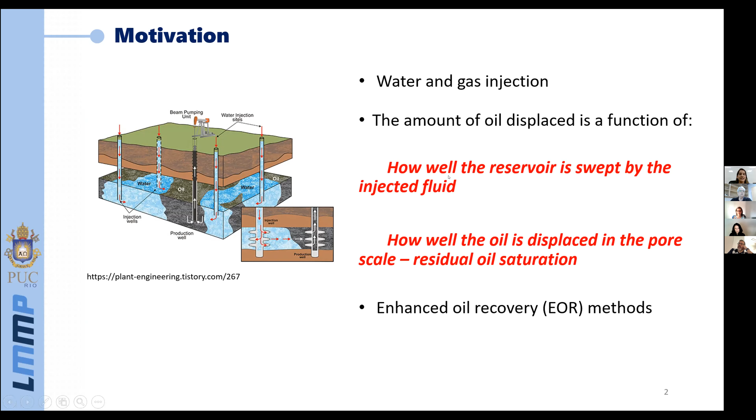Different methods can be used, with their own advantages and disadvantages. One of them is gas flooding. When injected in the reservoir, the gas flows through the upper part of the reservoir, leaving a large amount of oil behind. This is called early breakthrough. Also, we have the formation of instabilities, this viscous fingering. So the idea here is to reduce the mobility of the displacing phase.

We can do that by alternating water and gas. In the water alternating gas case, we have better sweep efficiency, but we still have oil remaining in the reservoir. In the third case, the surfactant alternating gas case, first we inject a slug of surfactant solution, then we inject gas. In this case, we are forming foam inside the reservoir during gas injection. Foams are better injection fluids than aqueous solutions because they are less sensitive to gravity and permeability heterogeneities.

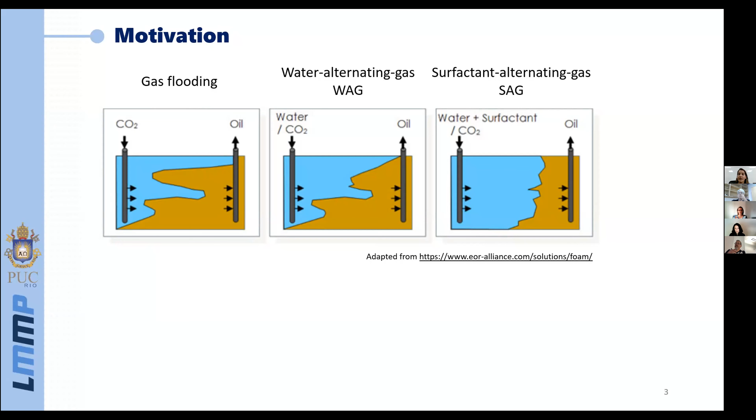The success of foam as an injection fluid highly depends on the generation and stability of lamellae inside porous media. Foams are a potential solution to mitigate the adverse effects of gravity override, early breakthrough, reservoir heterogeneity, and viscous fingering on the sweep efficiency during gas injection.

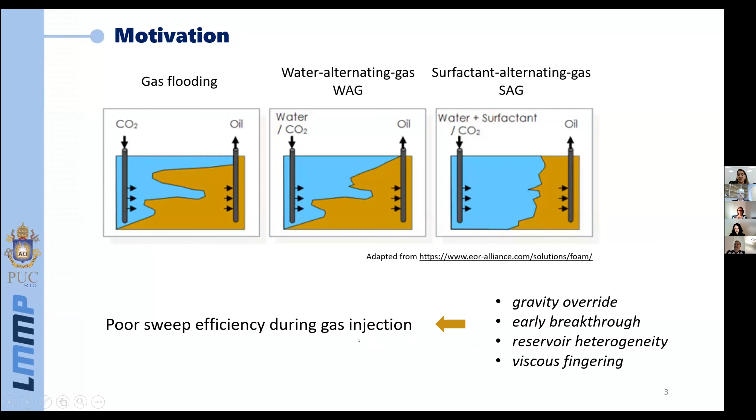Foam can behave in different ways in the porous media. We can have a gas path, with the gas flowing, and for the discontinuous gas, we can have bubbles flowing - this is a bubble train - and also gas trapped in bubbles. Foams are a two-phase system in which the gas is enclosed by a surfactant-containing liquid film, the lamella. Also, the other structures of foam are the plateau borders and the nodes.

Foam has high apparent viscosity by trapping gas in bubbles, reducing the flowing fraction of gas, and providing capillary resistance. So the idea here is to reduce the mobility ratio, and we can do that by reducing the relative permeability of the displacing phase and increasing the viscosity.

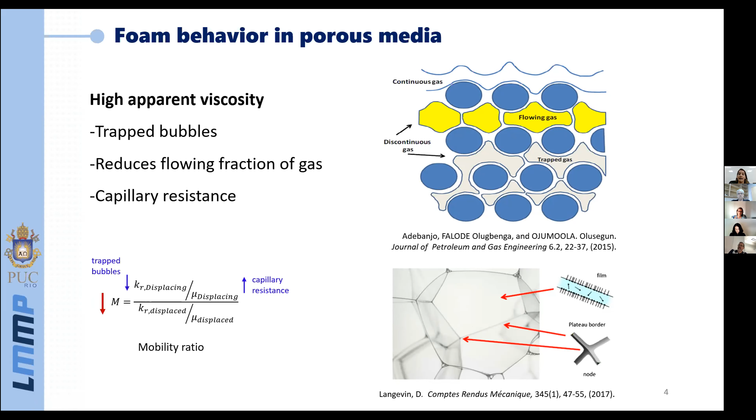Here, what we have is a three-dimensional foam. But when the foam is enclosed by the geometry, what we have is a line. Here we can see the liquid film, the lamella, and the two plateau borders connecting the lamella to the pore walls. On letter B, we can see the lamella flowing from 1 to 7 inside the pore body. In addition to the resistance provided by the presence of this lamella, the drag of moving bubbles along the pore walls imparts an additional viscous resistance.

The important parameters involved here are the lamellae number and the lamellae velocity. We are going to focus on the lamellae number. The image on the right shows the mechanisms that affect the apparent viscosity of foam.

On top, we can see that the presence of liquid between the bubbles is responsible for creating the resistance against flow. In the middle, we have the interface deformation because of the viscous and capillary forces that are a function of the flow rate. And at the bottom, we can see the surface tension gradient - the surfactant depleted from the front accumulates at the back of the bubble, and this slows down the motion of the bubble.

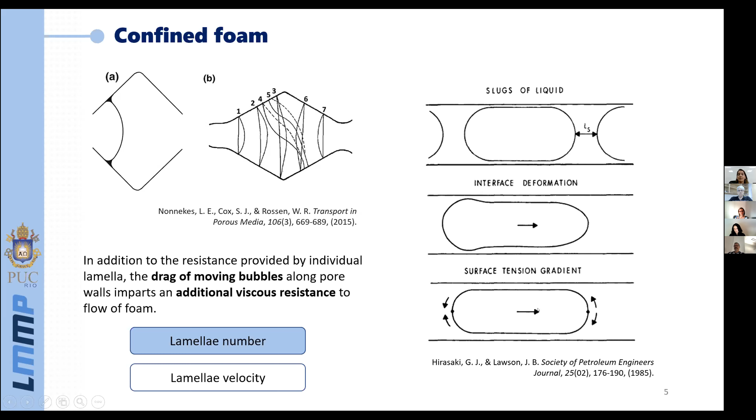The foam can be generated in different types in the oil industry. We can have a preformed foam, where the foam is generated outside the reservoir. We can have a co-injection foam, where we inject the surfactant solution and gas at the same time. And in the third case, surfactant alternating gas, we alternate the injection of surfactant solution and gas, forming foam inside the reservoir during this process. Regardless of whether bubbles are generated outside or in situ, the porous media molds and reshapes them.

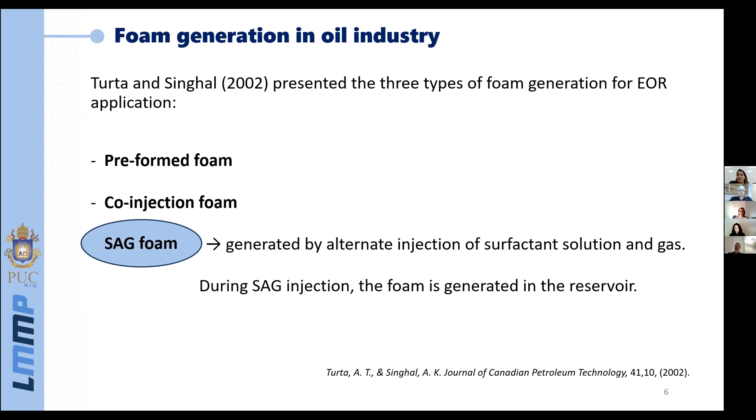Now, the literature review. In 1958, Bond and Holbrook were the first to show that foam generated in the oil reservoir by consecutive injection of surfactant solution and gas could increase sweep efficiency. And they described their invention in a patent.

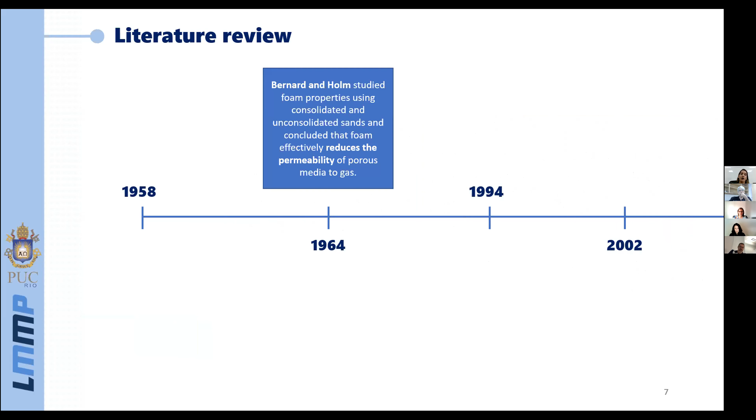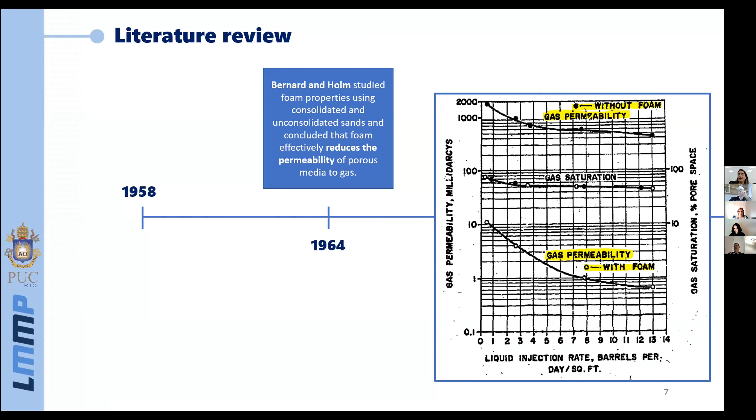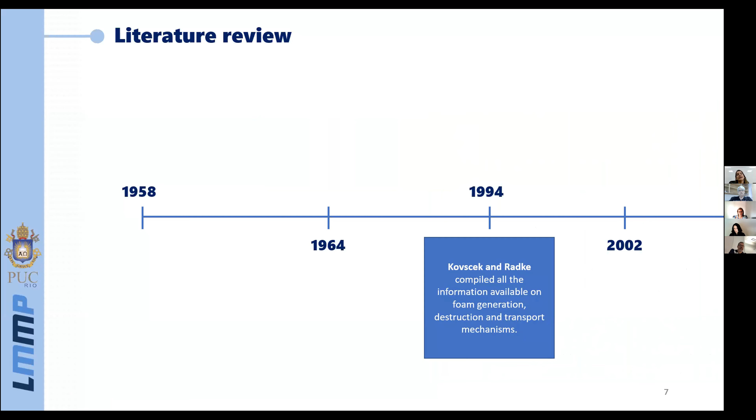In 1994, Kovscek and Radke compiled all the information available on foam generation, destruction, and transport mechanisms in a really interesting work. Here on the left, we can see one example of a foam formation mechanism called snap-off. In letter A here, we can see a gas finger entering a throat that was filled with the wetting liquid. At this time, the curvature and local capillary pressure rises to the equilibrium value.

On B, we can see that when the bubble goes to the pore body, the curvature and the local capillary pressure falls with the expansion of this interface. At this time, we have a gradient in the liquid phase that goes from the pore body to the pore throat, accumulates here as a collar, and then detaches the bubble. On the right, we can see how foam behaves in a porous media. We can have a continuous gas channel, gas trapped here in bubbles, and the liquid films.

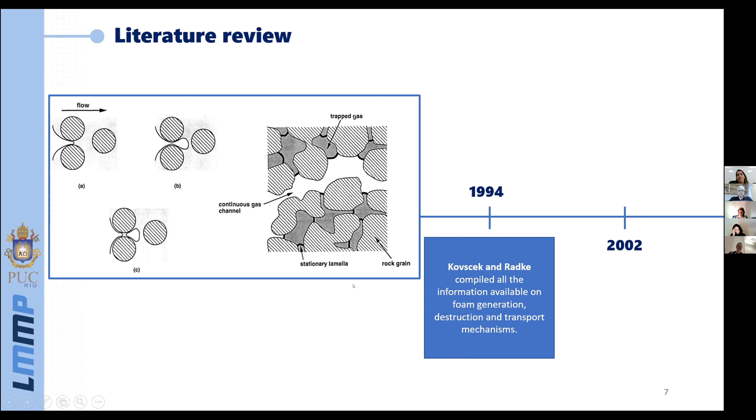In 2002, two works were published in the same journal, both studying foam generation in homogeneous porous media. The idea was to correlate the minimum pressure gradient, that is the pressure enough to form strong foam. For Gauglitz, the minimum pressure gradient scales with 1/K, and for Tanzil, it scales with 1/√K. The difference between these values could be explained by the fact that they used different surfactant solutions, different experimental conditions, and one did the measurements during the transient regime while the other waited until steady state.

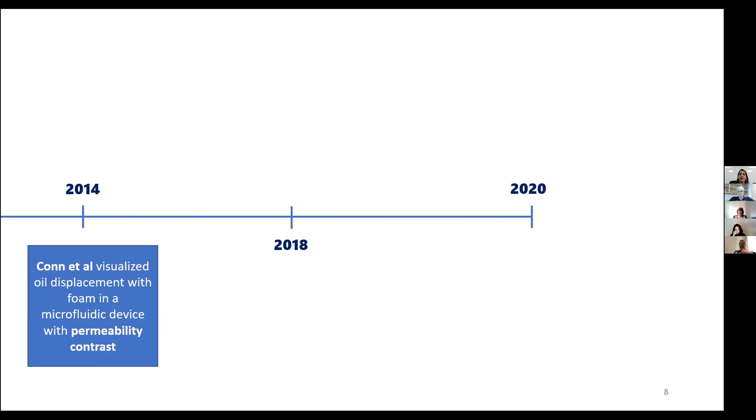In 2014, the Lisa Biswal group visualized oil displacement with foam in a microfluidic device with permeability contrast. Here is the porous media. The foam was pre-generated using a flow focusing device, then injected into this micro model saturated with oil dyed in red color. Foam first goes to the high permeability zone, blocks this area, and then diverts the gas to the low permeability region here.

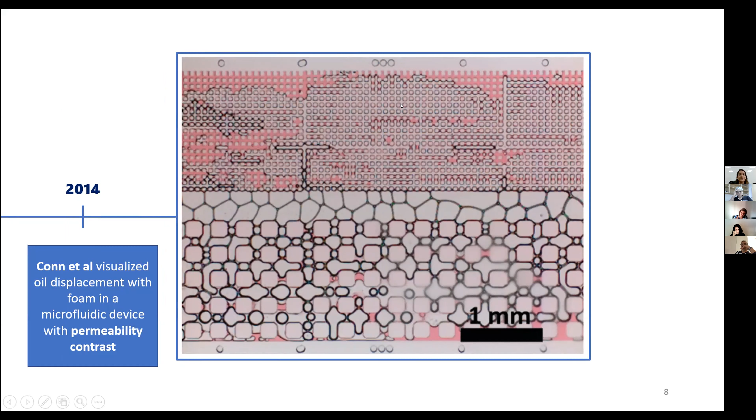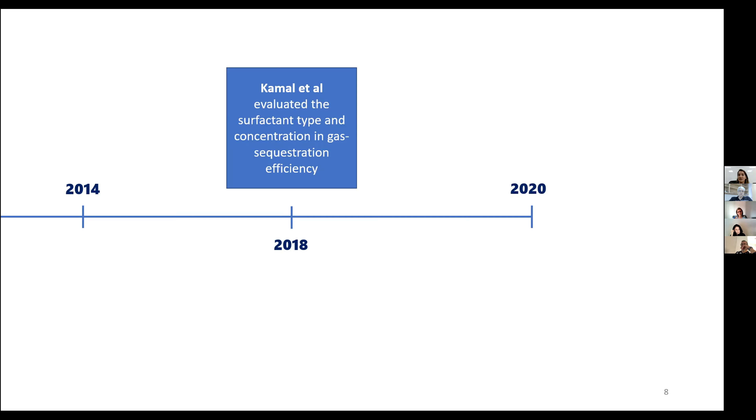In 2018, Kamal and collaborators evaluated the surfactant type and concentration in gas sequestration efficiency. To do that, they used core flooding systems here. And when they increased the concentration of the surfactant, they saw a huge increase in the pressure. This is the orange curve, the higher concentration case.

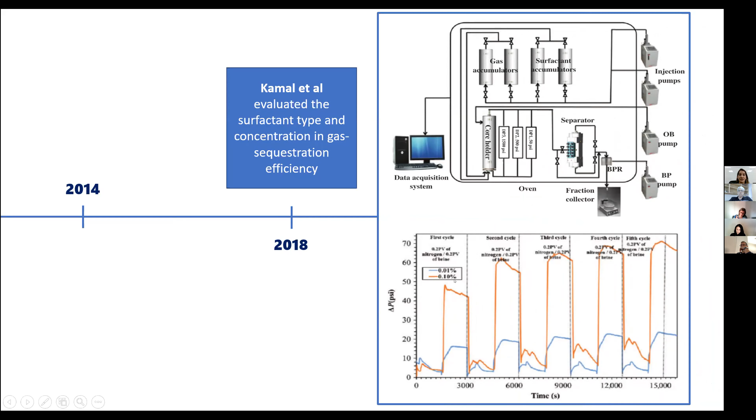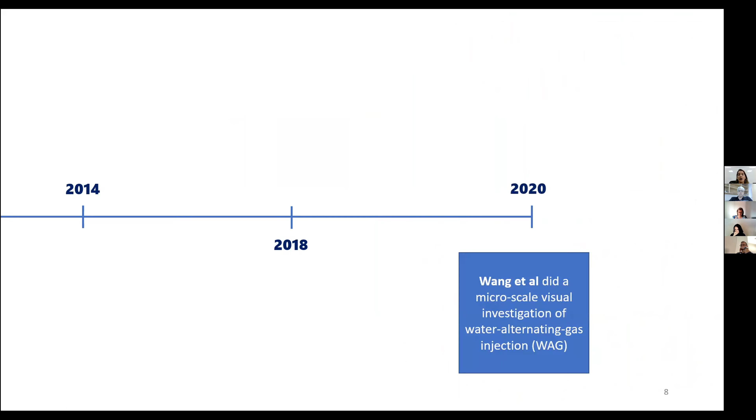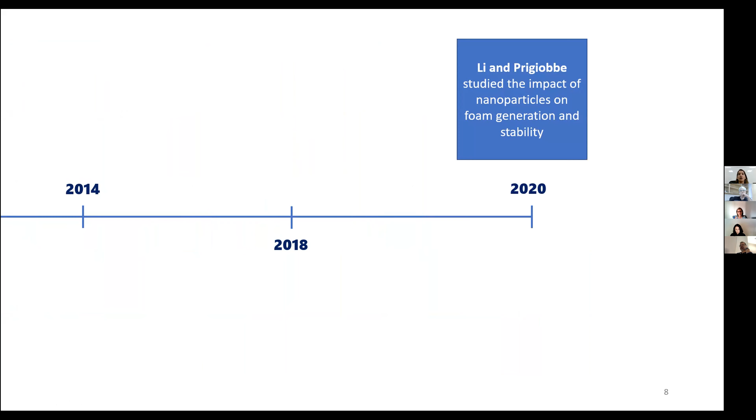Another work published the same year studied the impact of adding nanoparticles to the surfactant solution on foam generation and stability. They used a micromodel made with glass and dolomite, and added nanoparticles to the surfactant solution. They counted the number of lamellae generated, and also did pressure measurements.

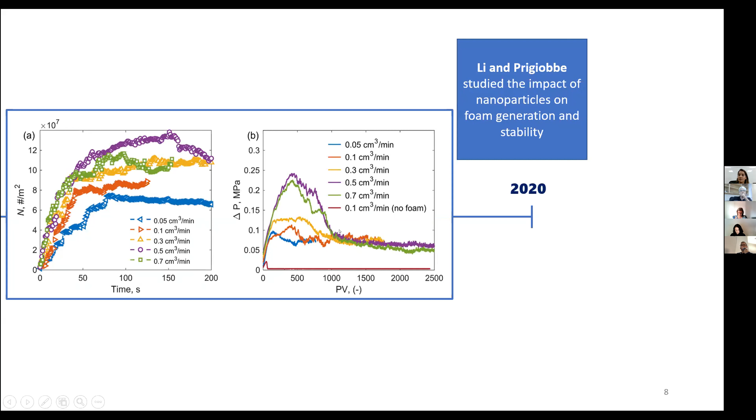Most of the studies that focused on pore-scale analysis are concentrated on preformed foam. In our case, we are going to form foam inside the reservoir during the gas injection. The surfactant concentration was studied before, but in core flooding systems that do not allow fully visualizing the dynamics. And the observation was conducted in other works, but not evaluating the surfactant concentration impact.

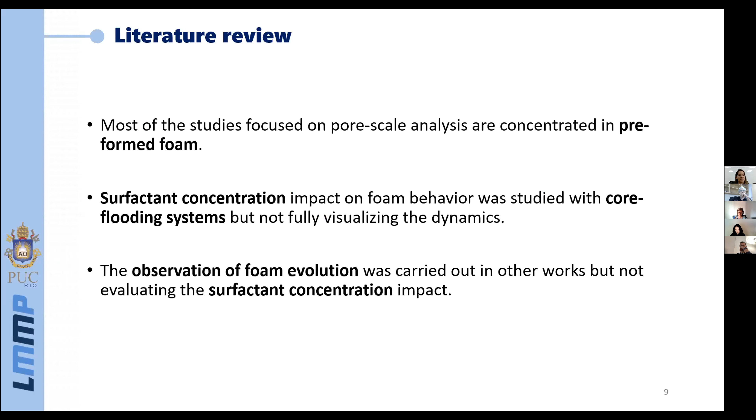The goals here are to study foam generation during drainage of a surfactant solution by gas, and oil displacement during SAG injection through a 2D porous media using a microfluidic system. Also to visualize the pore scale phenomena and obtain macroscopic information from the pore scale analysis that can be used to improve continuous models of foam formation and flow in porous media.

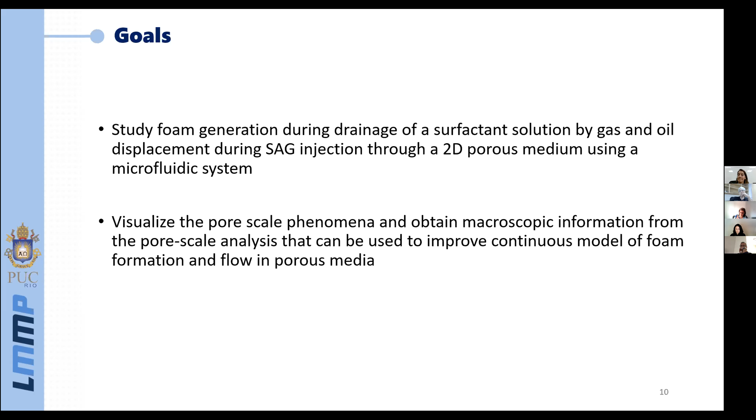To do that, we're going to use a 2D micromodel made with glass by Micronit. Here is a picture of the micromodel and its sizes. We have the inlet, the outlet, the glass pore structure, and one buffer zone at the entrance and another at the outlet. Here are the properties of the micromodel: pore volume, porosity, permeability, and channel sizes. Our biggest throat is around 250 micrometers, and the smallest around 12 micrometers.

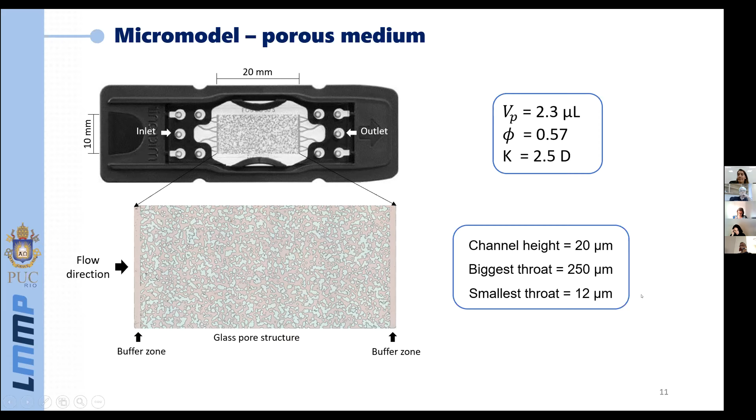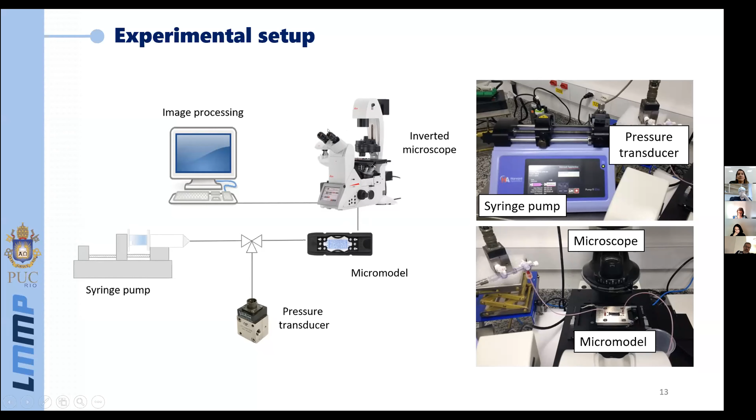This work was divided into two parts. The first part is about foam formation during drainage of a surfactant solution by gas. To do that, we used this experimental setup consisting of a syringe pump, a gas-tight syringe filled with air, a pressure transducer to monitor the pressure during gas injection, a micromodel, an inverted microscope, and a computer to do the image processing.

The materials used in this part: we used a surfactant solution made of a mixture of water and sodium dodecyl sulfate, an anionic surfactant. Here we can see the interfacial tension curve as a function of concentration. All these values plotted here were obtained when the interfacial tension stabilized for each concentration. The critical micelle concentration for this solution was 0.47 grams per liter, and the surface tension above the CMC was around 34.4 millinewtons per meter.

Another important parameter to consider here is viscosity. Here we have a table of viscosity for the different surfactant concentrations that we used. We can see that when we increase the surfactant concentration, the viscosity slightly increases.

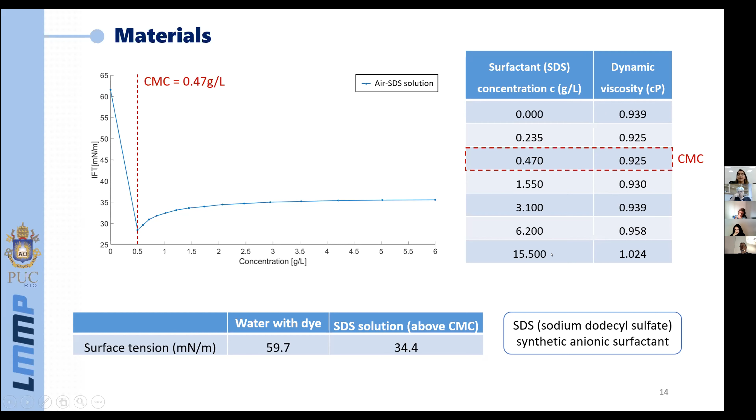To do the experiments, first we have to saturate the device with carbon dioxide to ensure complete saturation of the liquid phase. Then we saturate the device with water or surfactant solution. We use a different concentration for each experiment and inject 3,000 pore volumes. Then we inject gas at a constant volumetric flow rate equal to 1 or 2 milliliters per hour. We measure the pressure and visualize the flow dynamics, and the gas injection was stopped when steady state was reached.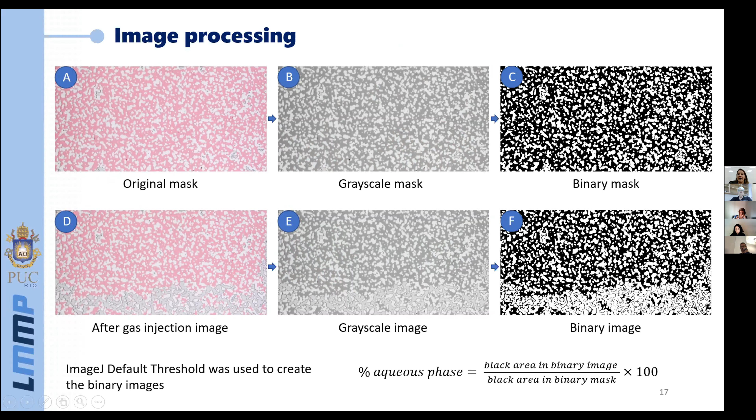To calculate the percentage of aqueous phase left in the reservoir, in the porous media, we divide the black area in the binary image by the black area in the binary mask. For this pure water case, the amount of water left was around 70%. We can see that the gas forms this preferential path, percolating the porous media from the inlet to the outlet.

Here is the pressure behavior during the gas injection. We can see that the inlet pressure rises for a very short time and then falls quickly, stabilizing at steady state.

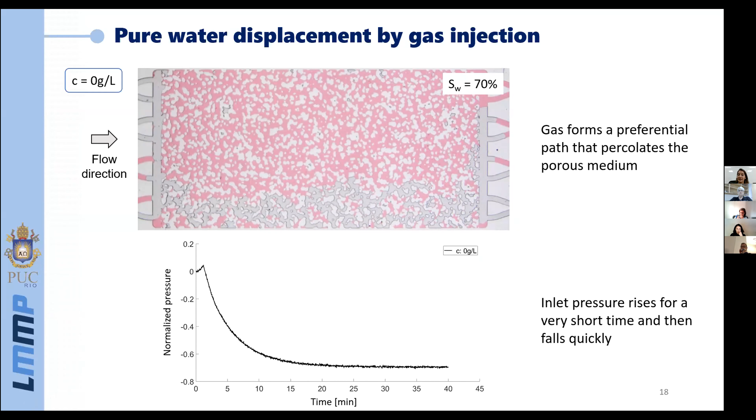Now we are going to start adding surfactant to the aqueous phase, and we're going to see that surfactant completely changes the flow behavior inside the porous media. Here we are below the CMC, at a concentration of 0.5 times the CMC. We form a few lamellae here, which we can see at the end of the porous media, and then we form two preferential paths, one here and the other one here.

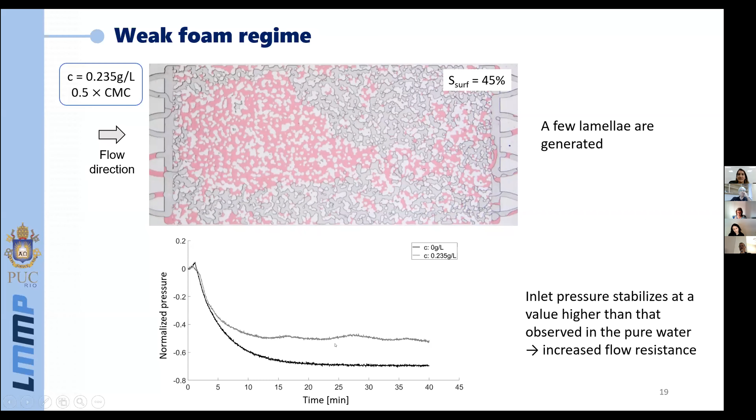The inlet pressure behavior is shown here in this gray curve. The pressure rises a little bit, then stabilizes at a plateau that is higher than the one obtained with pure water. That means we increased the flow resistance in this case.

Now I'm going to show you a video. At this time, the micromodel was saturated with surfactant solution. The concentration was one time the CMC. We are at the CMC now. The flow rate is the same.

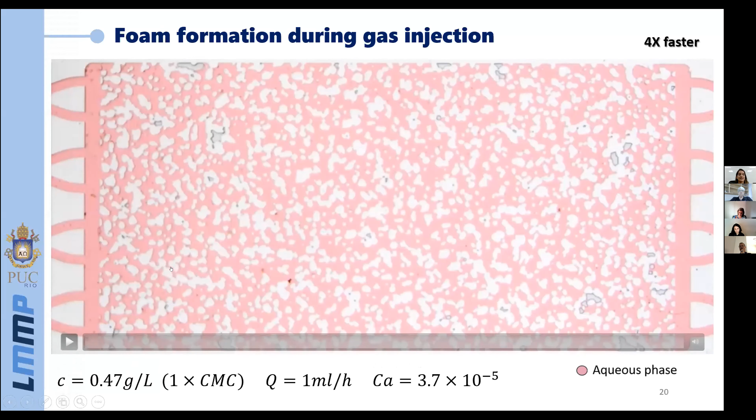This video is 4 times faster than real time. You're going to see the gas invading the micromodel from the left. The gas percolates the micromodel, and what we are seeing now is that we are forming foam inside the reservoir. Because of the geometry here, you can see that we have all these bubbles formed.

Now we are going to see a case in which 30 times the CMC was added to the aqueous phase. The same flow rate was used here. This video is 16 times faster than real time.

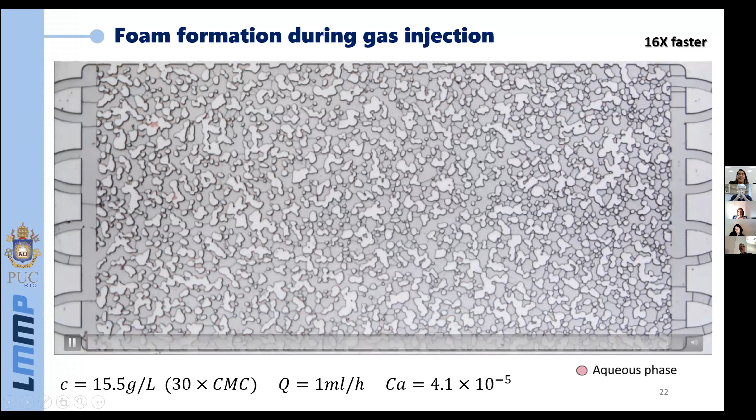At the end of the test, here I will put in the end of the video, the gas found a percolated path, and the whole device is saturated with gas. We only have liquid present in lamella form.

For these cases, all above the CMC, we have the same interfacial tension, but we have completely different behaviors in the pressure.

One possible explanation for the existence of these 2 plateaus is the thickness of the lamellae that were formed. So we believe that when we have higher concentrations, we are forming more lamellae, and we have enough surfactant to stabilize even thinner lamellae. In this case, we have thinner lamellae, and then we have a lower resistance to flow.

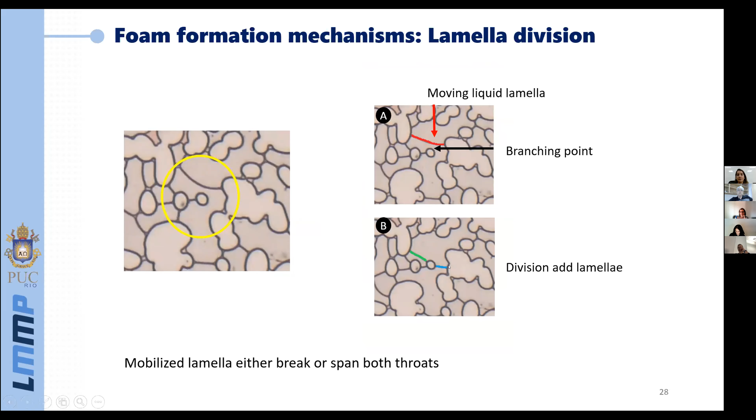Another foam formation mechanism, the lamella division. In this case, we have a moving lamella. This moving lamella finds a post or a branching point and then divides into two new lamellae, the green and the blue ones here in letter B.

Concerning the foam destruction mechanism, we have the coarsening. In this case, we have gas diffusion from the small bubbles to the larger bubbles due to the pressure difference. So large bubbles grow at the expense of the smaller ones.

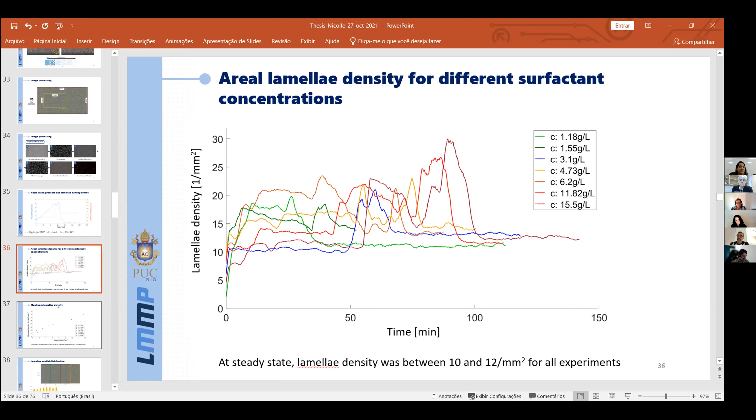So I have the same amount of lamellae in both cases. In both plateaus, I have the same amount of lamellae at the end. So I counted this multiple times, even in the whole device, the measurements that I did in the whole device. So at the end, I have the same amount. But I think I have a picture here, a backup slide with a different one.

So I think when we increase the concentration, we can stabilize thinner lamellae. That's for me one possible explanation for that. Maybe I'm not really familiar with foam enough to see how the thickness is going to affect the final pressure.

But do they move at the end when you're still injecting? No, they're not moving at the end anymore. Here, let me show you a video.

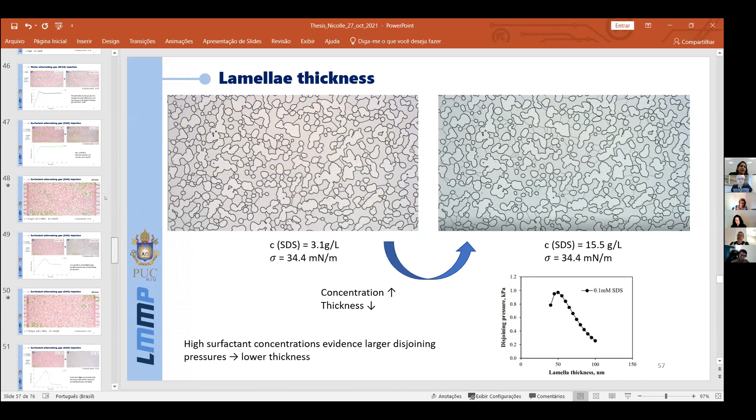Let me throw one more thing to complicate the discussion: when we first saw these results, we thought that there would be different percolation paths, so the lower pressure would mean we have more percolated paths. This was not the case. Sometimes at the lower pressure we only have one percolated path, and at the higher pressure we have more than one percolated path, which I cannot explain. I don't understand why.

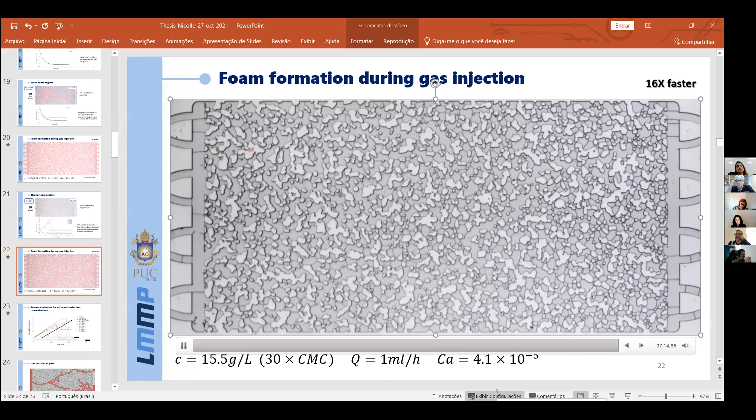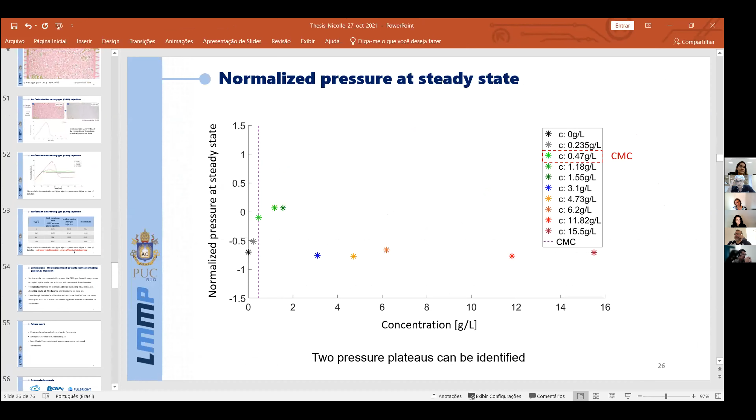Yeah, I have the percolated paths here too. So in this case, we are at the higher plateau, and we have much more paths than in the one with the lower plateau. That for me is the opposite of natural thinking. I was expecting the opposite, that for the lower plateau I would have more paths.

In your skeletonizing, before any lamella are there, does this look like a low resistance path compared to the other one? Could that be an explanation, that it just happens to have picked a low resistance path for this one? These, so in the case with higher concentration, you have...

Yeah, this one here. Yes. What Tim is asking, if you go to this slide, is by any chance this one a lower resistance path than this one? Yeah, I don't think so. We did a numerical simulation of the single phase flow, and it doesn't look like there's any particular preferential path. It seems very uniform, like the grain or pore throat distribution.

Okay, so that cannot be. Well, this is a very complicated business. Yeah. Thank you. I think I have another question.

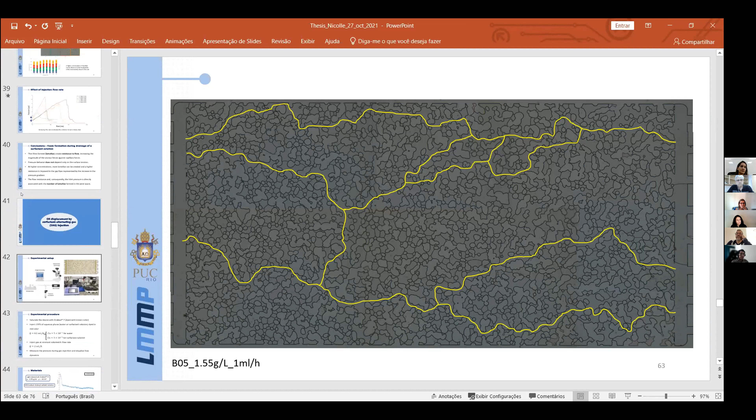So in this slide where you changed the flow rate — this one — yes, okay, so when you double the flow rate, technically the time should be half to reach steady state. Do they fall at almost the same time if I divide the time for faster flow rates by 2? If you divide the time that it takes to reach the steady state? Yes.

Yeah, I didn't calculate this relationship with time. I know the values for maximum pressure, but I don't know if time is related. But if you make the time dimensionless with the flow rate, the slope is the same, so I think this looks the same. I did scale this up plotting the flow rate.

That's in the thesis, the writing part. I had a suggestion when I sent you comments - what we're saying is that if you put this in terms of pore volumes injected, that's another way of normalizing this. Do they overlap? Yeah, it's a great idea.

Sorry for the interjection - yeah, it would be the same normalization. I had a general comment at the beginning in your literature review. You showed us two different scaling approaches: pressure scaling with inverse of the permeability, or the square root of the inverse of permeability. Is there any way you can compare your results with either scaling?

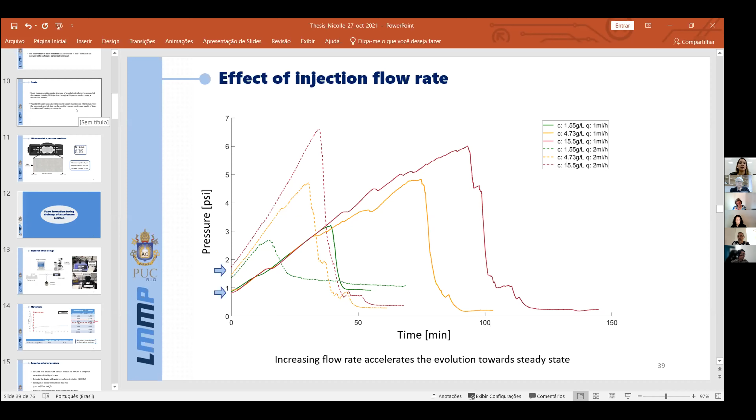No, Nicolle, can you go back to your introduction - is it this part? Yes, this one, right? Yes. No, they formed the... ah, okay, sorry, I was confused.

I didn't try to make a relationship between this pressure gradient and the permeability, but it's a good idea. I can calculate that to see if there is a relationship.

Do you think it's possible, Marcio? We have one permeability only, so we cannot - we could try different models, but we only have one, or Nicolle ran the experiment only for a single device.

And one thing is that, like in the plot where she showed the number of lamellae, you have a very sharp increase in the very beginning, but I think it's a different system, because in this case they are co-injecting gas and liquid. In our case, we are injecting gas into a saturated porous media, so we start forming lamella right away. That's why in the number of lamellae she showed a very sharp increase and then a stabilization. I don't know if we can directly compare, because in these other experiments they are controlling the saturation of the gas phase with respect to the liquid phase, while in Nicolle's experiment, she's changing the saturation with time. So I'm not sure if it would be easy to get a comparison or correlation with these experiments.

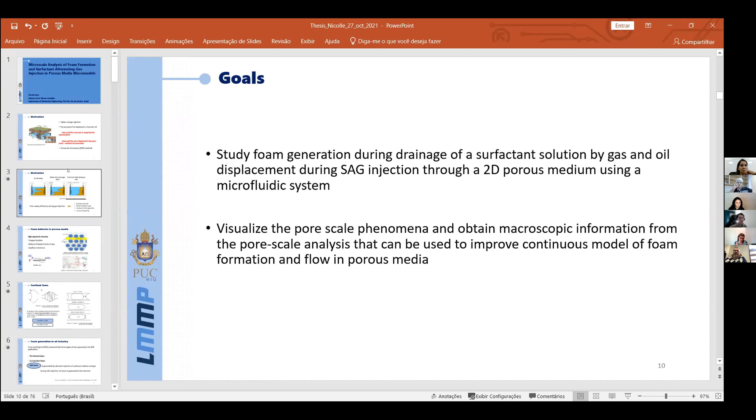It's a graphic of pressure over time, so you have time on the horizontal and pressure on the vertical. This one here. Yeah, that's the one.

So usually in oil engineering, we put breakthrough time in all graphics like that, because I try to understand from your video and it doesn't seem so. If it would be in core flood, this peak should be the breakthrough. But it doesn't seem to when I saw your video. So now I'm a little bit lost. Maybe you can mark, is this a breakthrough? Yeah, this is the gas breakthrough.

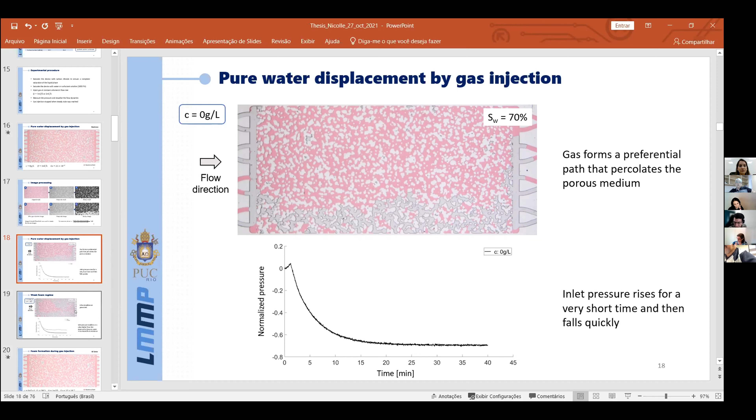Yeah, but then it's another one. If you go, I think to 17, and then this one. And then you can see that when you add surfactant, it's quite smooth. There is no peak anymore. There's a really small peak here, but so where is the breakthrough? So maybe it's a good point to add breakthrough to all figures in your thesis, just to make sure the reader understands what's going on.

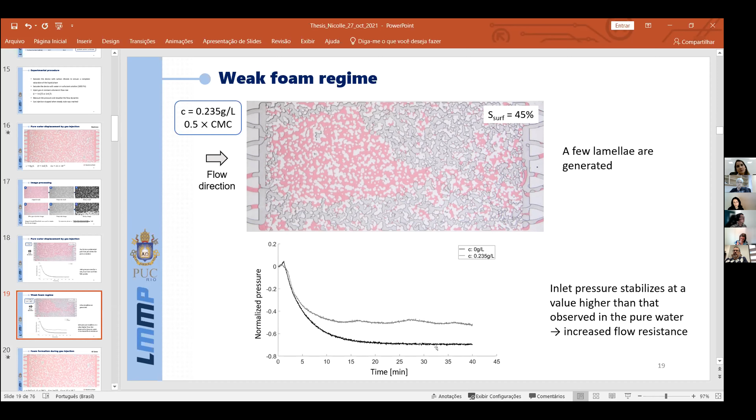Because then the question, of course, is with surfactant, do you have earlier breakthrough or later breakthrough? Exactly this one. So here, in all these times we have... oh, not the breakthrough. Yeah, sorry, this is when we find the percolated path. So not the breakthrough. Yeah, it's really, I didn't understand, and I don't really understand the physics here.

So it would be interesting to know if you already did the experiment, so you can just conclude something about the breakthrough time. Yeah, I already have the time for each experiment, the time for the breakthrough. It's really easy to add like a line or a point to mark the time when we have the breakthrough.

One important point that's not clear to me is what is the breakthrough in the case that you have a surfactant solution? Because is it the first point where some gas reaches the outlet, but it's not a percolated path? Oh yeah, you're right, so that's the point. So the percolated path is the maximum there. You're right, already producing a lot of gas, but it's not a percolated path from the inlet to the outlet. Yeah, you're right, Marcio.

So it's only for the graphic where you don't have foam, so it's the first one. Yeah, you're right, and then that might make sense, of course. Okay, then in the figure, your slide 23 again. So my natural expectation, if you add more surfactant, at some point it has to just stop making lamella. This cannot grow forever, right?

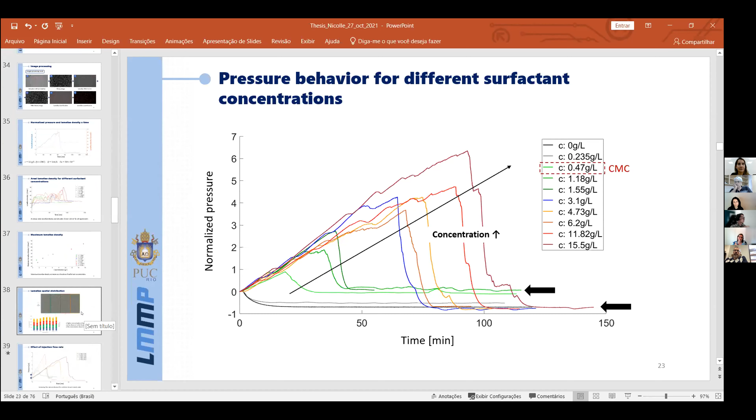Yeah, I have a theory, I was thinking about that the other day. Here in this total lamella number, you can see that we have a maximum value at the exit, and the values here were growing as we increased the concentration. All the values were around 600. I don't know if maybe in this region I would reach 600 too, maybe having the same amount of lamella as in the other regions.

So what you're saying, actually 15 is quite close to the border. No, 15 is the highest concentration. No, I mean if you put 18 or 20 and then it stops forming anymore, then there is no effect, so somewhere there is a limit. Yeah, there's a limit, yeah that's what I'm saying. Maybe the limit is like around 600 lamellae per region.

Yeah, no, I understand what you say, it's perfect because I didn't see any work about that. Actually we are working on modeling how surfactant concentration influences foam displacement, and there is a lot of literature, a lot of hypotheses. The most common one is that above CMC, nothing happens - that's the dogma today. So your thesis is changing something on this point, because today, over CMC, there is no influence of surfactant in the mathematical models on foam displacement, and you're saying, no, it's actually a lot of difference.

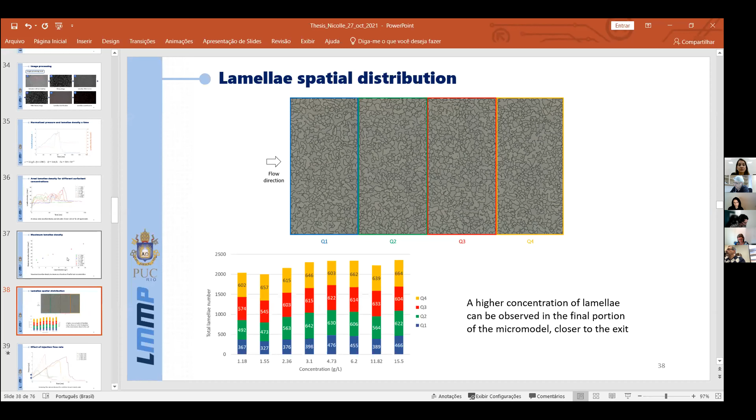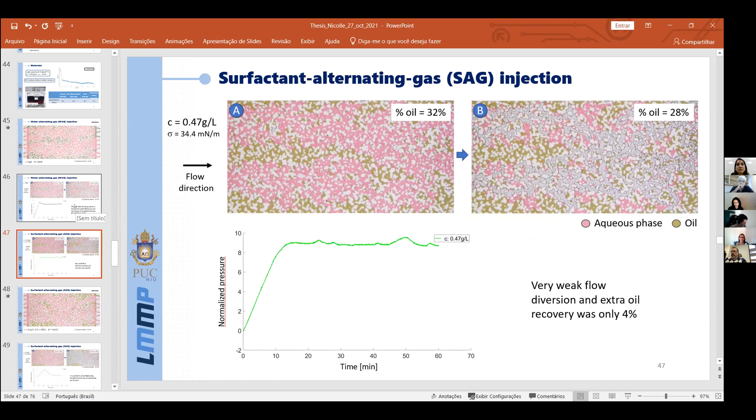Okay, well, and then in chapter 5, you have this discussion about weak foam and strong foam. And then you show in this graphic of pressure that you have a lot of pressures depending on surfactant concentration. Yeah, you show them, yeah, for example.

So then you argue in your thesis that some of them are connected to weak foam and some are connected to strong foam. And there's this classical figure—it's really recent, actually, not so old—where you measure, you change the flow rate, so FG or FW on the horizontal axis, and then you plot your apparent viscosity, and you get a triangle. So we say that the left part of the triangle is weak foam and the right part is strong foam. You have a really classical division of what is weak foam and what is strong foam, just visually.

And then I was wondering if there's some other type of study, since you are studying different directions. So you are now just changing concentration, so the FW is the same—the amount of liquid you are injecting is the same. So you are just adding one dimension to that plot, and maybe there is some change in behavior depending on concentration. I'm not sure it's trivial for you to plot, but maybe you have a lot of data, so the point is plotting this data in some smart way, and maybe you can observe the behavior change. This will actually make a lot of difference as well, because that plot was really classic and now it's everywhere.

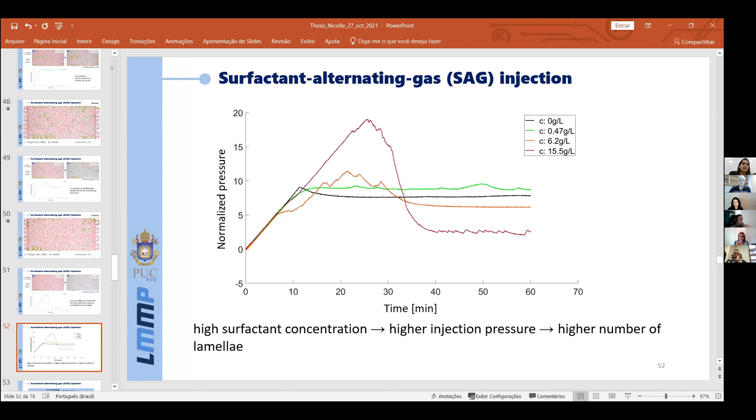I agree totally with Vladimir about the goals, especially because when I started reading, I was also kind of lost in that first chapter of introduction about the objectives exactly. The second chapter gave me a better idea, but still - when you show, not the goals but the slide before the goals, which I think is slide 9, if you can show it - I understood better, because it's really the gap in the literature that you're addressing. More studies are focused on that, and how surfactant concentration can impact it is what Grigory is so interested in. You already got his interest because there is a gap in the literature and knowledge there, and I saw that clearly reflected in the results, because I wasn't quite matching what I saw in the introduction with the results. She focused both on chapter 4 and 5 on the effect of surfactant concentration on that.

My first suggestion, and it's not a requirement, just a suggestion - it doesn't even have to be for the thesis. Did you already publish this work? No, not yet. Then I suggest that for the title of the paper, you include the words 'surfactant concentration', because that is going to be the key factor in your research. If you just leave it like 'micro scale analysis and foam formation', there are going to be a lot of those keywords in the literature already. But when someone sees that you studied the effect of surfactant concentration on that, it becomes more interesting and fits more into the gap you detected in the literature. Also, reformulate those goals to be more specific and point out what you really want to show - I think you show some of that. That's just a suggestion. I know changing the title of a thesis is very complicated, so no need to do that now for this thesis, but at least for the paper, I will strongly suggest it.

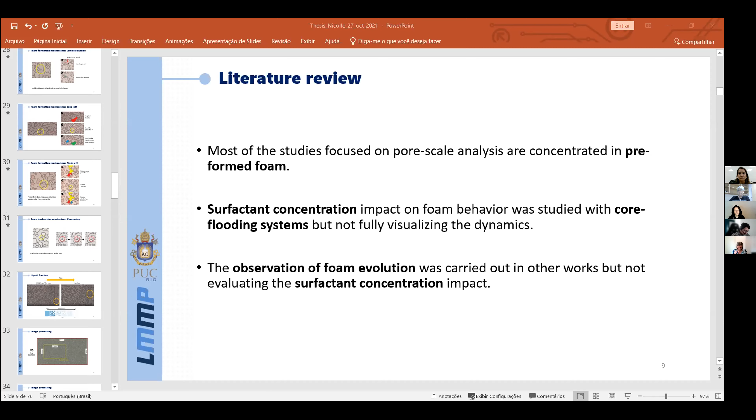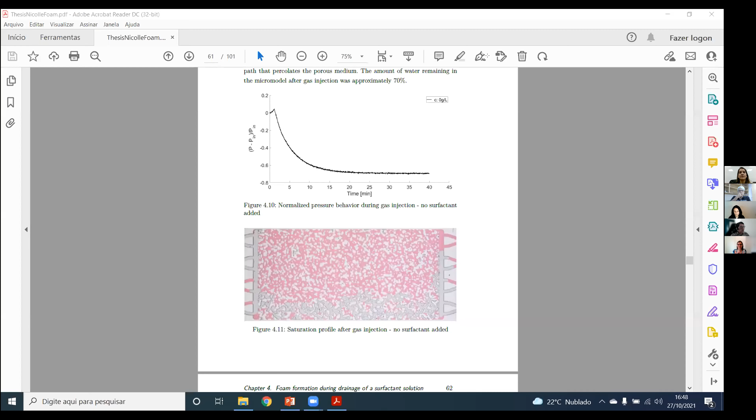But I really want to discuss the surfactant with you. So if you go to, and now I'm going to need this thesis, if you can put it up, because I don't think you're showing here figure 3.3, which is the air-water interfacial tension. If you can, please, let me share the screen again. Since you mentioned you haven't published yet, I'm trying to help here before you publish, some things I would like to point out. The thesis? Yes.

Which page? It's page 47. Yes, so you see, that's a typical graph for me of either contaminated water or a not clean enough pipette for the tensiometer, because water, especially with that conductivity you're showing there, I assume it's Milli-Q, because it's very low conductivity. Water surface tension is 72.5 or around that point. It cannot be 62. In this case, we added dye to the water. But you added dye to the water when you measure the interfacial tension? Yeah. Because what you have there is typical, water will never reduce the surface tension like that. That will be the dye in the water. So then in that case, you need to specify that, because the way you say it, the equilibrium surface tension of the water is 59.7.

Yeah, here. So if you added the dye, for me it wasn't clear at which point you added the dye. I think it's important. Even if you don't need that, as I don't think you need it, at least in this case, that can make a bit of difference. If you don't need that, I wouldn't even show it, because it's just bringing a question of why you have a water that reduces surface tension lower than expected, and it takes more than 2 hours to stabilize. It doesn't make any sense in my head. It has some contaminants, that's what I was saying. But if it is the dye, it means the dye is a little bit surface active, and depending on the concentration of the dye, it can also be affecting the surface tension curve of the surfactant.

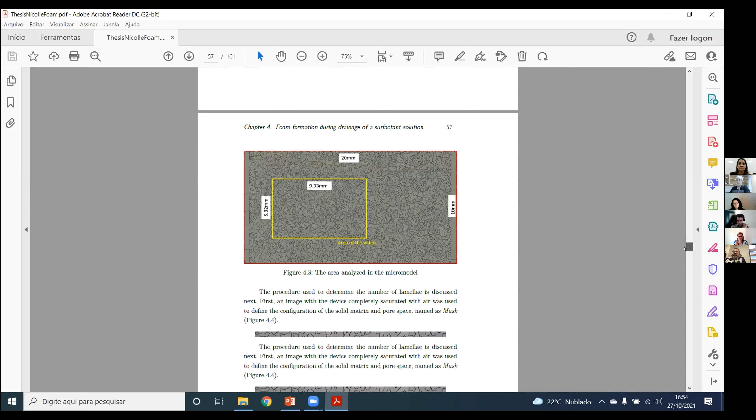Because if you start looking now at all the graphs, for example, if you go to the one I separated into two. If you go to the page, what can be the graph? That graph that everybody has been discussing, slide 23, I think, is page 66. You can go to page 66.

Here, if you look at that without looking at the concentration and not knowing where the CMC is, for me there is an obvious trend for the three green ones, and then the blue one changes the trend. Now you go to see concentrations, and the green ones are 1.18, 1.55, and the blue one is 3.1. So exactly where I told you that should be your CMC.

And CMC might not seem important, and I understand for lamellas and all that, but CMC is important because you need to be at least above CMC to get some good results. And you can see that also correlates with the lower pressure. The blue one is the one that goes all the way down, while the green ones, which are below CMC—well, in my opinion you still are above—so you have different trends, and that makes more sense to me.

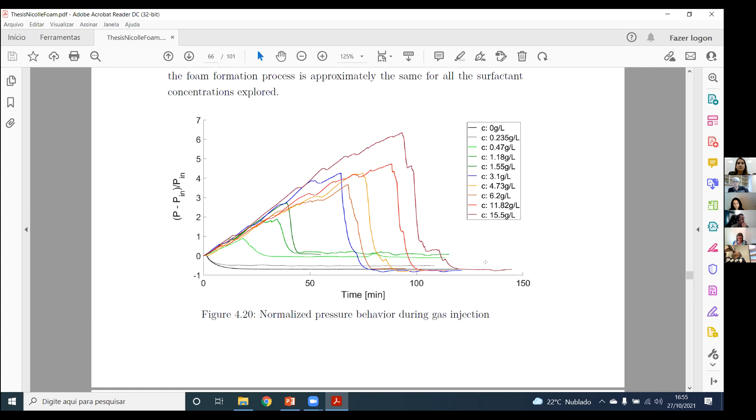Forget about the 15.5, which I think is a very, very high concentration. It's like 10 times, which is not 30, it will be something around 10 times CMC, but 10 times is a lot, right? But you see the other ones are almost stable, so that means plateau. Even when the number of lamellae can increase, you can see a behavior that is more stable, while the other one is increasing, because actually below CMC you don't have enough surfactant to have something.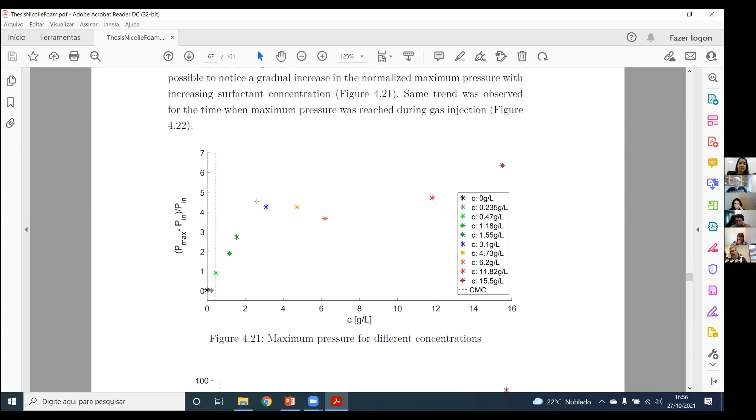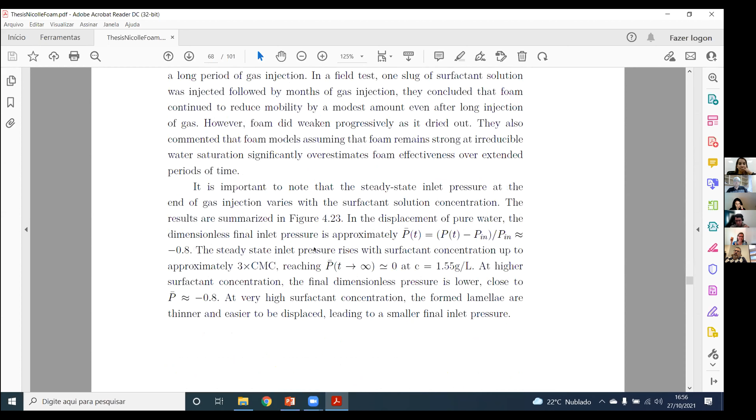So I suggest you rethink about the CMC that you are reporting, and I can send you the paper. It's quite an old paper, but there are other papers more recent that explain very well why in commercial surfactants like that one with 90%, you can see that. Because then you will have to rewrite some of the explanation. You cannot call it anymore below CMC, above CMC, but I think it will make so much more sense.

Even when Shima was talking about the one that only has 2 percolations, I think it passed at exactly 3.1. I was like, oh God. It's so easy to explain when you consider that the CMC is between 1.5 and 3.1. If you had salts in there, I'd believe the CMC was lower, because salts reduce CMC, but you don't have any salts here.

As I say, for every graph from there, I'll give an explanation based on that. What's also important regarding the thinner lamella you observe at very high concentrations, it might relate to what I mentioned earlier. Even with a large number of lamella, it can weaken the film's elasticity because the Marangoni effect doesn't work well when the surface tension gradient is resolved by surfactant in the bulk rather than the lamella. Imagine elasticity like this, and the surfactant makes it come back. But if it comes from the bulk, it just stays stretched, it doesn't go back, and that weakens and thins the lamella. Because of that, you get a lot of destruction of lamella. That's what's interesting, that the number of lamella keeps increasing.

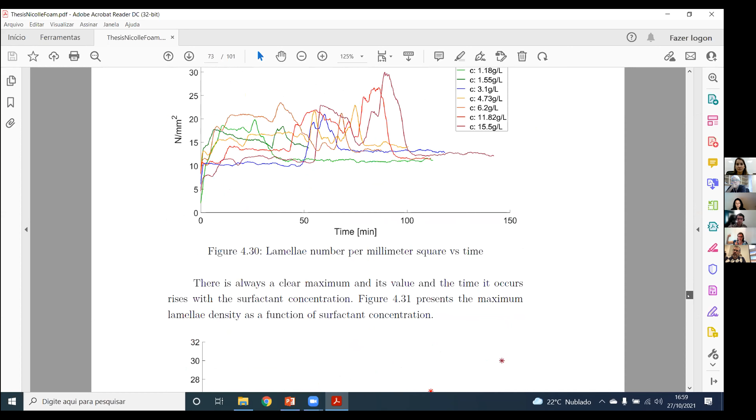But that depends on how you manipulate graph 4.30, where you count the number of lamella, because it has several peaks. It's true that 15.5 has a peak, but it also has a first peak before that at the same level, same with the red line, and then it decreases. So on those two higher concentrations, you have two peaks. I'll stay with the first one, which you can compare with the others, and you'll see it stabilizes, it doesn't increase anymore.

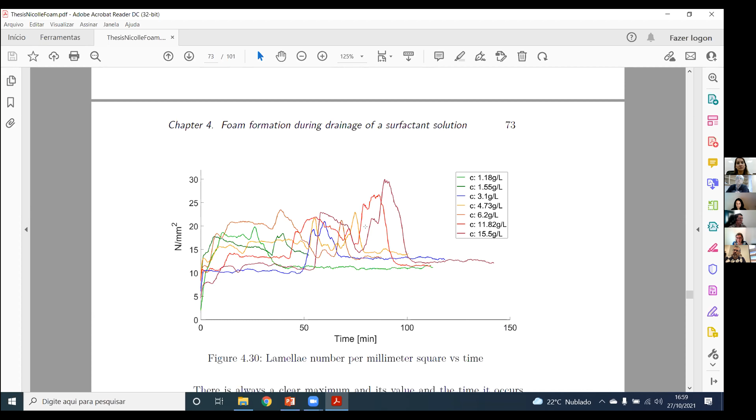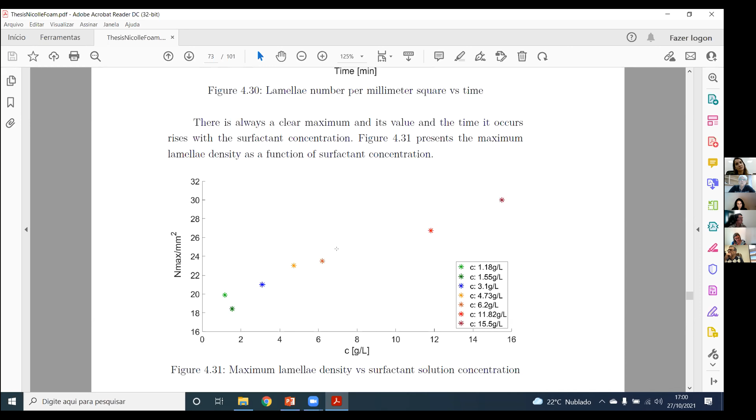CMC is not the key, it's not the only parameter to look at, but you definitely need to be above the CMC to have something more stable. It will be a combination of the CMC with the number of lamella you can generate in the porous media - that equilibrium between forming and breaking the lamella.

So I already talked about this. Other than that, I really think you can draw much more powerful conclusions with that analysis, and really bring out the importance of surfactant concentration without needing to get into a lot of chemistry. I think understanding those points I just mentioned can hopefully contribute to the thesis. That's it, thank you very much for the patience.

Thank you very much for all your comments. You were great. Well, thank you, Aurora.